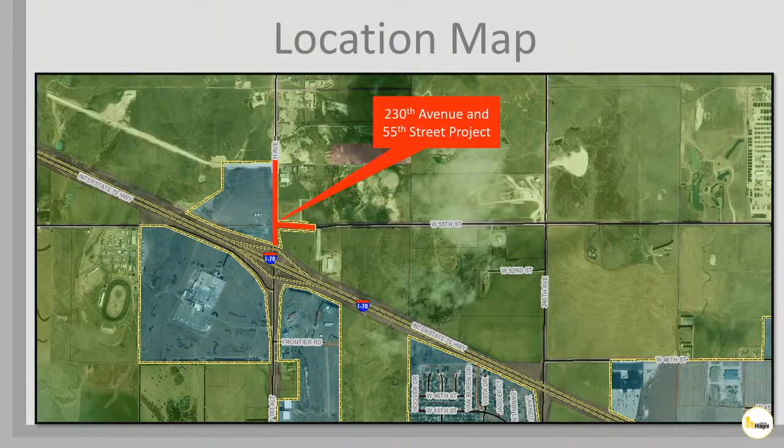Good evening, Commissioners. I am John Brown, Project Manager for the City of Hays. The project to improve the intersection of 230th Avenue and 55th Street is located just north of the I-70 exit 150 interchange.

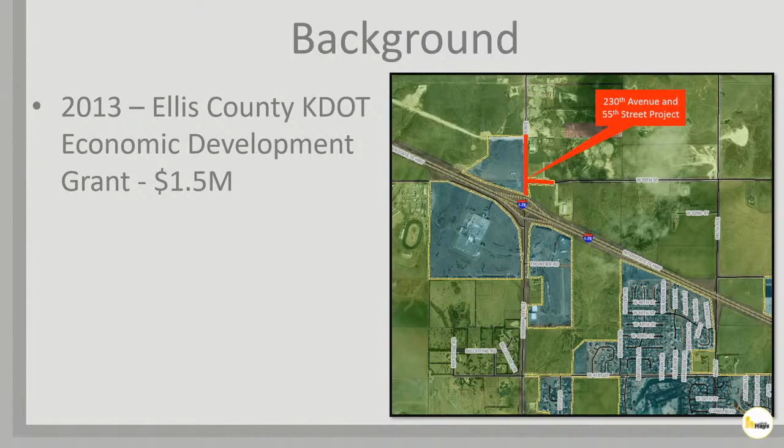In 2013, Ellis County applied for and was awarded economic development funding from KDOT, which eventually amounted to $1.5 million for improvements at this intersection. The proposed development of the Hays Truck Plaza project prompted the annexation of property and right-of-way in the area of this project. In December 2019, the Ellis County Board of Commissioners requested that the project sponsorship be transferred to the City of Hays.

In May of 2020, tax increment financing, a CID, and a developer agreement were approved in support of the Truck Plaza and the 230th Avenue and 55th Street project. In July of 2020, the city entered an agreement with KDOT formalizing the responsibilities of both the City of Hays and the Department of Transportation in advancing this project.

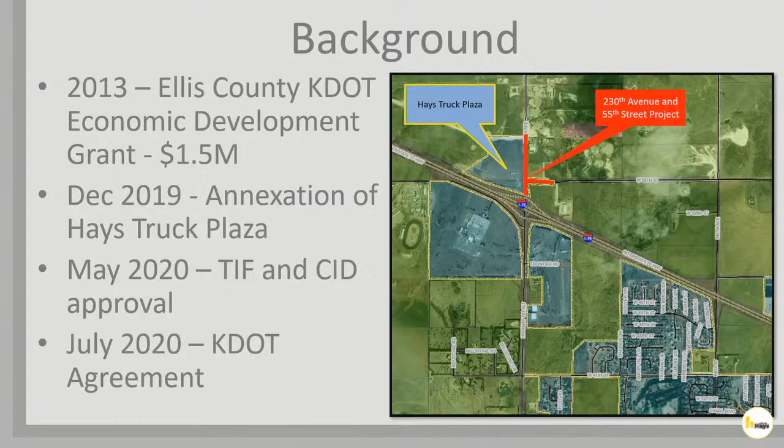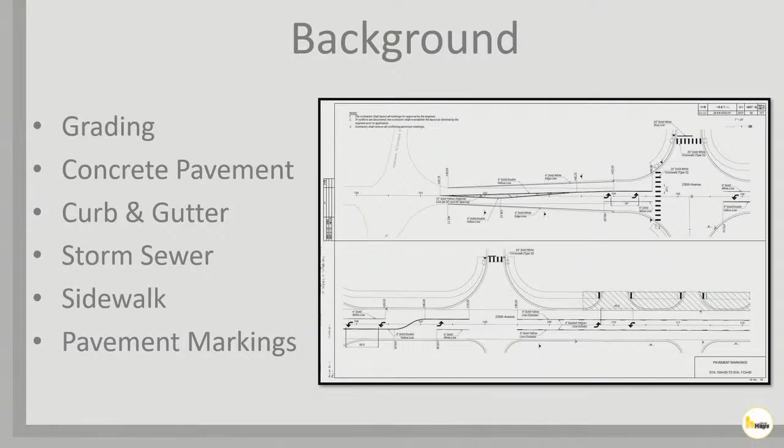The project includes grading, pavement, curb and gutter, storm sewer, sidewalk, and pavement markings to improve 230th Avenue from north of the westbound I-70 ramps to approximately 1,300 feet north of the 55th Street intersection, and improvements to 55th Street from 230th Avenue to approximately 800 feet east.

Since the project is partially funded by KDOT, the city has received concurrence from KDOT to award the bid to Hess Services. The current schedule calls for construction to begin in May and be completed within 120 calendar days. Inspection of the project would be completed by Driggs Design Group if approved as recommended in the next agenda item.

With the low bid of $1.8 million plus the construction engineering costs of $140,800, the total project is currently $2,019,101. The development agreement from May of 2020 between the city and D&J Land and Development LLC requires...

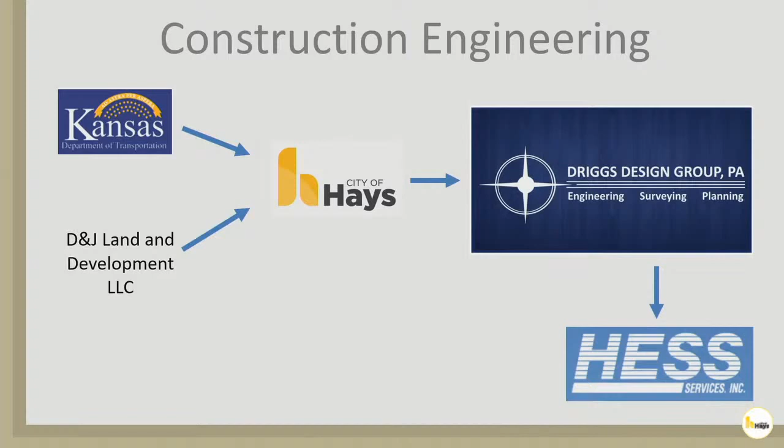The agreement with D&J Land Development obligates the developer to fund the cost of the city to hire a consultant to provide said construction engineering services. As such, Driggs Design has submitted an agreement to provide said professional services at a cost of $140,800 to be reimbursed by the developer.

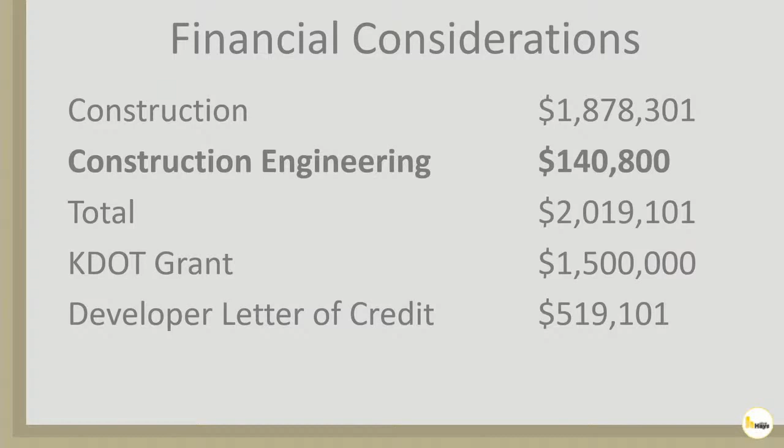As discussed in the previous agenda item, the development agreement between the City of Hays and D&J Land Development requires the developer to cover project costs in excess of the $1.5 million KDOT grant, to include the $140,800 of construction engineering. The commission has the option to enter the agreement with Driggs Design, direct staff to another option, or to do nothing, and the action requested is on the screen.

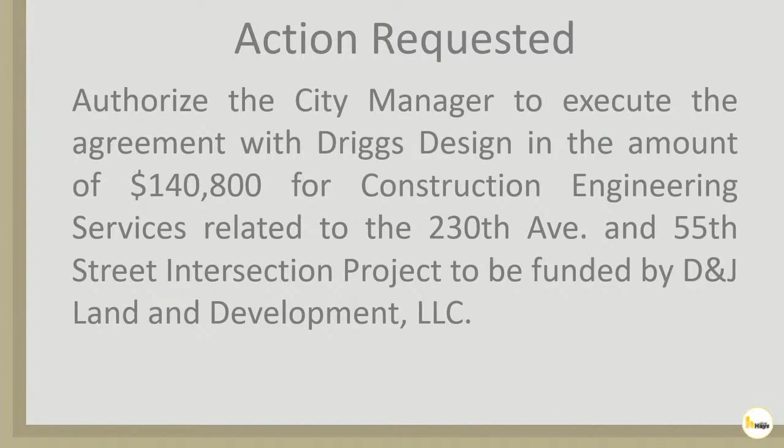Make a motion to authorize the city manager to execute the agreement with Driggs Design in the amount of $140,800 for construction engineering services related to the 230th Avenue and 55th Street intersection project, to be funded by D&J Land Development, LLC. Seconded. Moved by Commissioner Musil, seconded by Commissioner Burgess to approve the action requested and recommended.

Discussion? Hearing none, I'll call for the vote. All in favor, please say aye. Aye. Opposed, same sign. Approved 5-0.

Thank you. Item 8, 2021 water production lime slaker. Did you hear that, Mr. Crispin? Slaker. You did very good. Thank you very much. I learned.

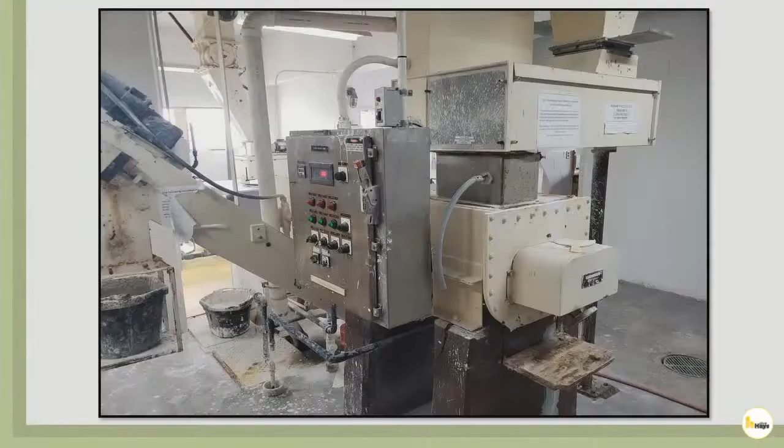Good evening, Commissioners. Jeff Crispin, Director of Water Resources. Staff solicited bids for the 2021 water production lime slaker project to replace the current lime slaker system in the water plant. The lime slaker is an important piece of equipment that converts dry calcium oxide, also known as quicklime or pebble lime, into calcium hydroxide slurry.

The equipment creates the slurry, and then the slurry mixes with water in our large primary clarifiers at the plant. The slurry assists the water plant operator in adjusting the pH and also helps remove impurities in the water within that clarifier. That is a picture of the current unit, and I have some other pictures as well.

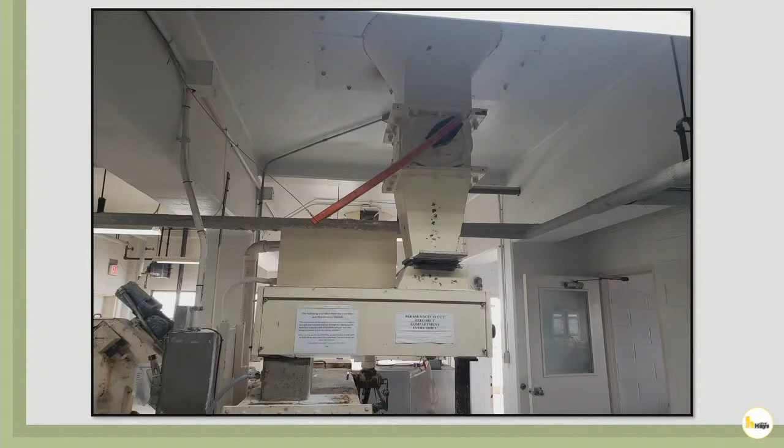The current lime slaker is 15 years old and has had multiple in-house repairs over the years. The equipment has reached its end of useful life and needs to be replaced.

The lime slaking machine runs 24 hours a day, 7 days a week, 365 days a year. The current model has 130,000 hours of continuous use, and I should have updated that number since last week—it's continuing to run right now.

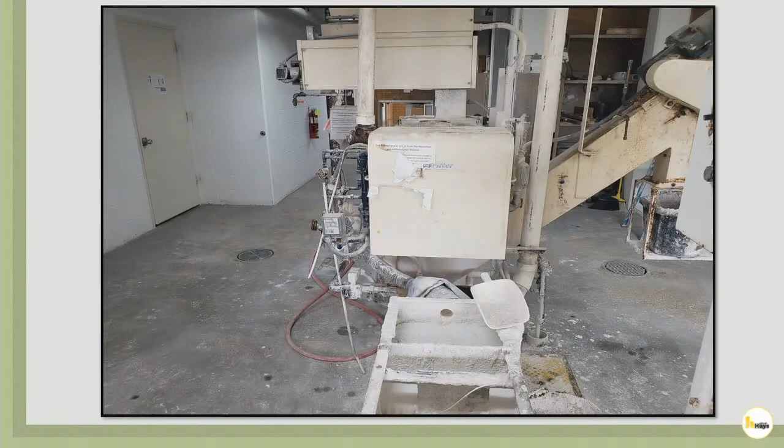This is the top of the machine. That is where it receives the lime, or the product, from the top of the bins when you drive by the water treatment plant. The bottom of this photo, right there, is where the slurry is introduced into the water and then into the primary clarifier.

The top right of the screen, that conveyor, takes larger pebbles and things that should not go into the water, and that basically gets hauled off. We get rid of that when it's full.

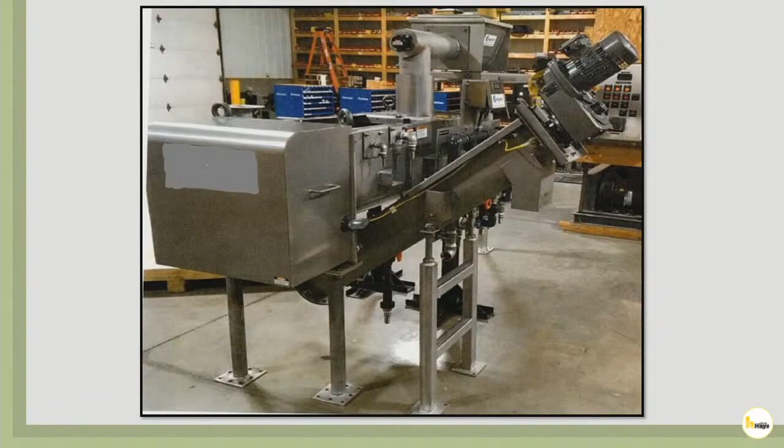Pretty simple. This is a photo of the proposed unit. The proposed unit is stainless steel. It's from the same company as the current unit, and it's designed to work with all the current connections it's already hooked up for. The other nice thing is that stainless steel will hold up a lot better than the current one.

We opened bids—one bid—on March 2nd, 2021. Integrity Municipal Systems of California submitted the bid for $119,000. The equipment is an updated model similar to the current unit in the plant. Integrity Municipal Systems is $81,000 below the budget, which was about $200,000.

One thing I wanted to add: last week we discussed why there was such a big difference in the budgeted amount. We had thought we would have to have it installed professionally, but the last time the unit was installed 15 years ago, staff installed it. So it'll be designed to just basically hook up and go, and they will have a person here on scene while we are doing that work.

After a notice to proceed is given, the unit would take a month to design. They will submit specifications to us to review, and then after approval, it would take 12 weeks to build, ship, and get to us at our water treatment plant. It comes with a 1-year warranty, and 2,000 parts within this unit are available and can be shipped to us within 48 hours.

And we would have probably some of the same parts that could interchange already on the shelf, so that will be helpful. For the financial portion of this project, it was listed in our CIP in the 2021 budget for $200,000 to be funded out of water capital, and the total cost is $119,000.

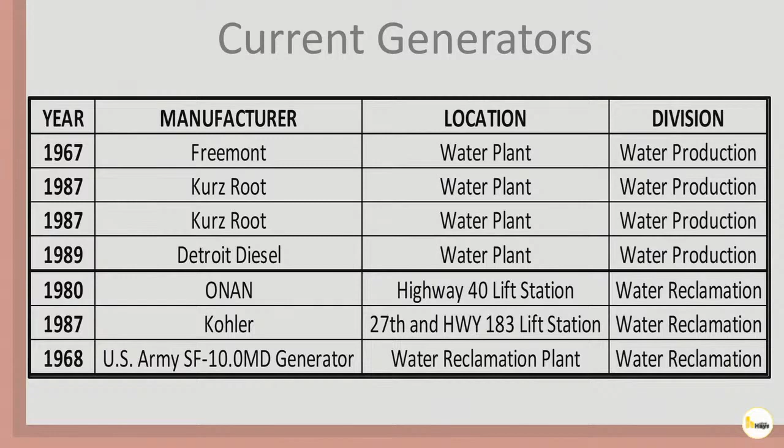And I will mention, I'm not sure if I mentioned it last week, we would use Purple Wave, which is kind of our normal process for disposing of equipment. So there probably will be some interest in those old units.

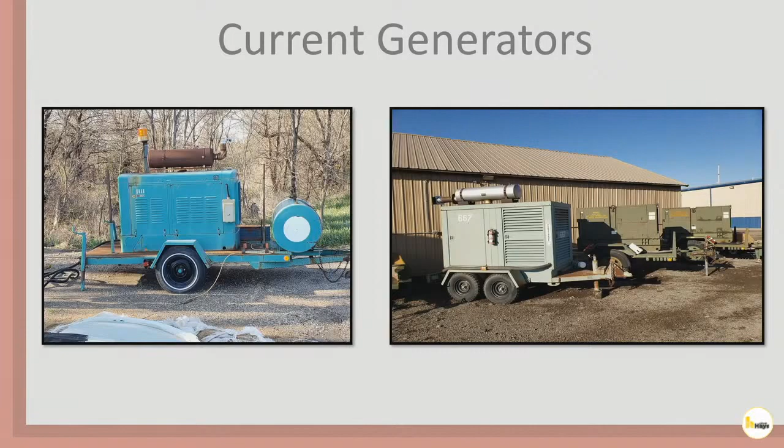I did mention last week we've had situations where we've used them. Our booster station near 41st Street and Skyline, when you take that curve, there's some underground items there. That's a booster station we've had to hook up one of the units to operate, before the commission approved a new line and new booster station. That booster station was the only way to get water across, and if it lost power, you couldn't move water across to I-70. So it's very important we get those. Water reclamation has 3 generators, and the water plant has 4.

Bids were opened on March 23rd with 8 contractors listed. Foley Power Solutions of Topeka, with an office in Wichita, Kansas, submitted the lowest bid at $94,705.74. When preparing the 2021 budget and obtaining budgetary quotes for generators, staff was unaware of the necessity to include a 25-foot power cord and required plug accessories to connect these units to our lift stations and water production wells. This additional accessory added about $15,000 to the total equipment bid, so without that we would have been pretty much right on.

We intend to replace 2 units every year, so I would come back to you next year, hopefully, and present that, and then the following year too. But we will budget accordingly to make sure we are covered. As you can see, there were quite a few bids, including some local ones, like United Rentals and Don's Electric. We had pretty good submissions, but this unit is a very nice unit.

It's a Caterpillar XQ60, a diesel unit, with a 1-year warranty. They said delivery within 24 weeks maximum, but that was the very top end — they said they could get them to us a lot quicker. Foley is located in both Wichita and Topeka. Their service rep stated they have a parts drop-off location in Hays, so if a part had to come to Hays, it would arrive pretty quickly. Service within 24 hours by Foley, which I think is great. That unit could run 24 hours straight on a 75% load with a full tank of fuel. Obviously, I hope we don't have to do that, but it's available, and we would continue water service for our citizens.

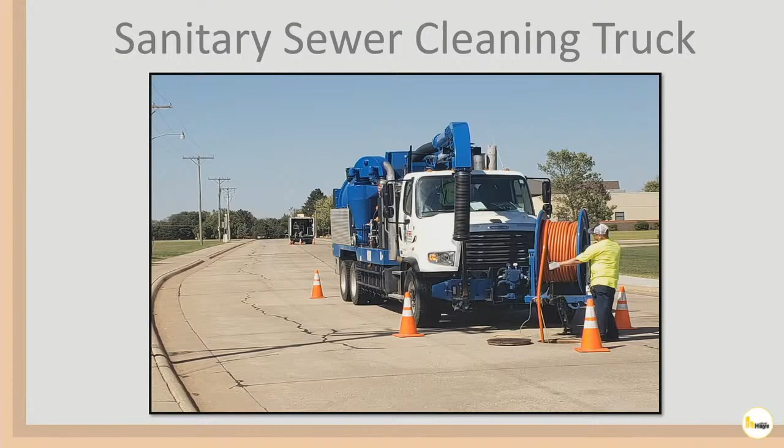A nozzle is inserted in the manhole, and high-pressure jetting is used to remove debris. I threw this one in last week.

The nozzle is pushed with a jet of water from manhole to manhole. Debris is collected from one manhole and disposed of at the wastewater treatment facility.

We require them to use what's basically called a basket to catch anything. We really don't want anything going down the line and getting to our wastewater treatment plant. So they take what they catch, put it into our drying beds, and we take care of it from there.

At the same time that they're doing this, a camera inspection occurs, so we can know the nozzle's going through, it's being cleaned, and we can see any defects within our sanitary sewer lines.

Typically, one pass is for light cleaning, and that's how we've been bidding out this project, because we know every single line's going to need light cleaning, but you don't necessarily know you're going to need medium or heavy cleaning. Medium is 2 to 4 passes, heavy cleaning is 5 passes, and both come with additional costs.

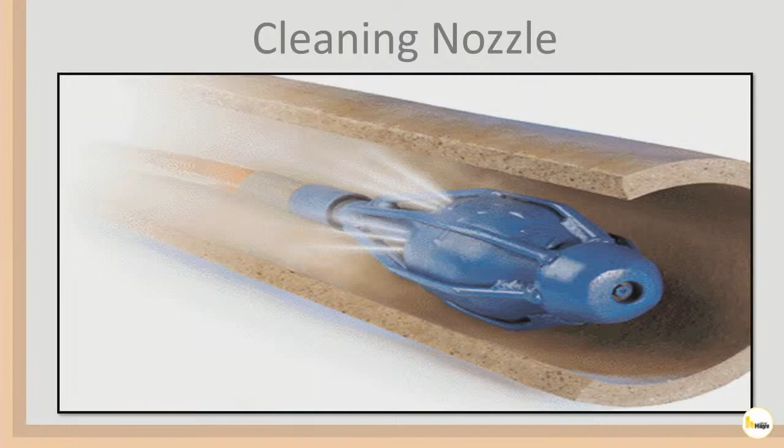Video inspection has also been required as part of our cleaning contract. It is included in the bid amount.

This helps provide early detection of flaws and will allow for repairs to be made before catastrophic failure. It allows the contractor and city staff to make decisions on additional cleaning methods and repairs as necessary.

The foreman that is out works hand in hand with Tobin Miller, our supervisor over our collection and distribution system, and if they notate something going on or additional work needed, he would be contacted and can make a decision on scene, or it comes from me. Previous inspections since 2013 have produced a pretty substantial record of abandonments.

That's an area where the camera can't get through: cracks, holes, tree root issues that need to be taken care of. We've used this information to make decisions on repairs for our sewer system.

In 2020, pipe detectives removed 50 tap intrusions from the project area that was approved last year.

In 2018, we took that data with the Office of Project Management. Anyway, we did point repairs, starting point repairs in 2018.

2019, we moved to lining, which is manhole to manhole. 2020, we did point repairs again, and most recently I was in front of you for the 2021 CIPP lining project, and you may notice a truck running around Hays doing pre-cleaning. So that project has started.

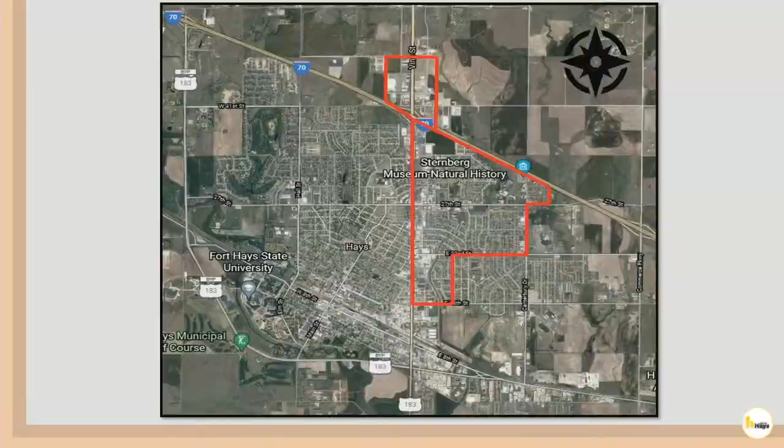This is a new slide this year, added so you know what we follow. We are in section number 4 this year; next year it'll be 5, then 1, 2, 3, and we continue that process to ensure proper flow and that our lines are in good shape.

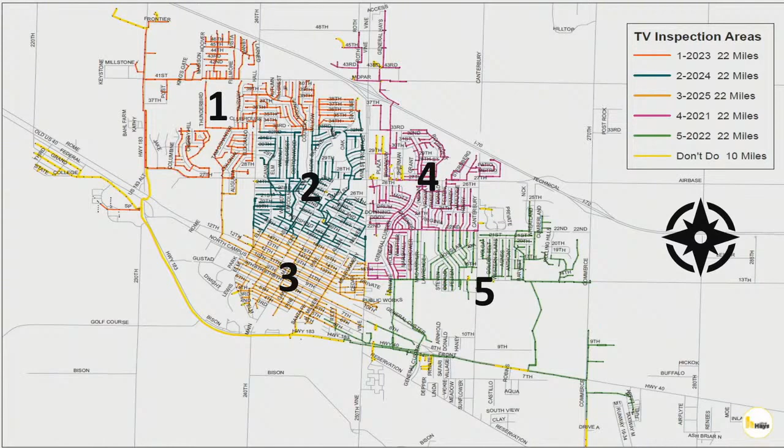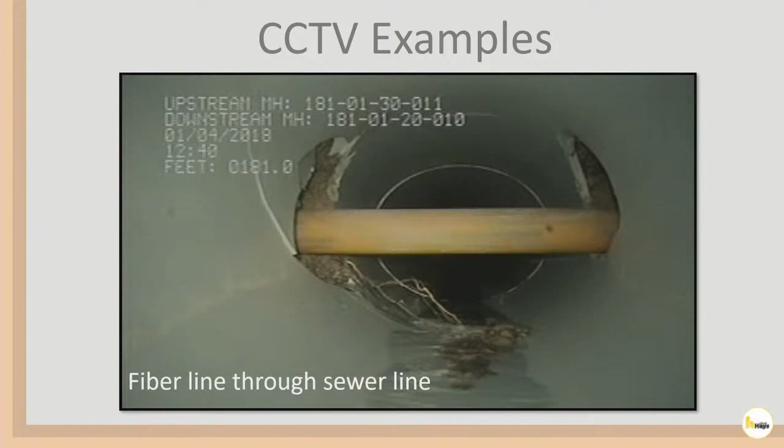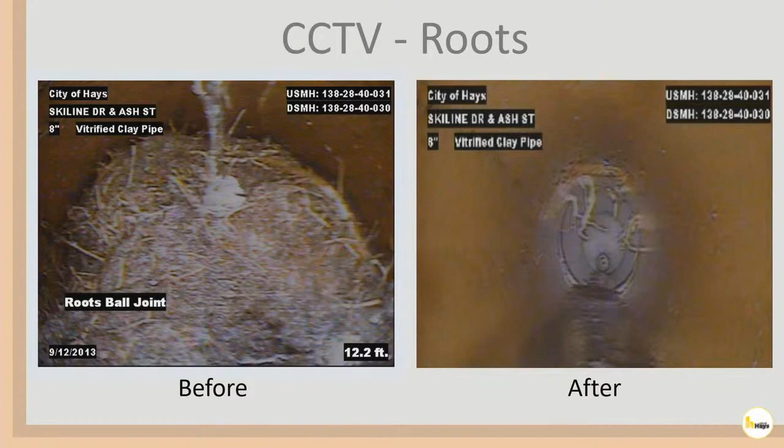We've had that a few times, and we contact them, and they've been receptive to helping us out. This is also called a root ball. They can grow in there from a tap or a crack, and need to be removed because they'll obstruct things. On the right side, you can see a cutting tool that's removing that root and keeping the line open.

I sent RFPs to 10 firms for the sanitary sewer project and CCTV inspection. On March 30th, we opened 4 proposals from those bidders. The low bid for sewer cleaning and video inspection from Pipe Detectives of North Dakota was $108,937.57, for light cleaning of our 8-inch sewer line. You'll see that Pro-Pipe was pretty close to that.

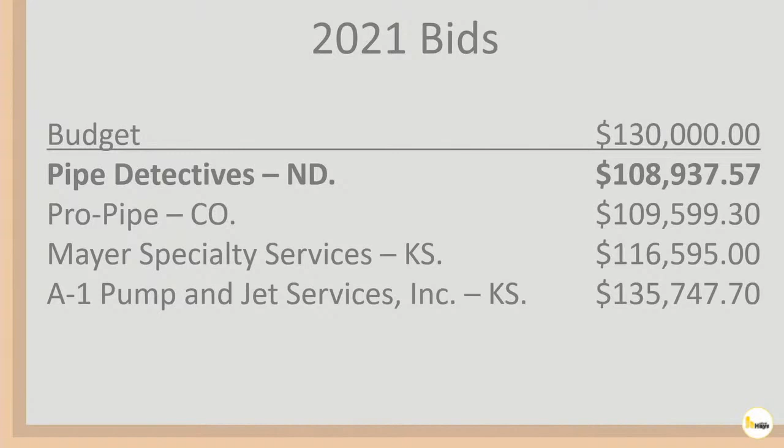We've actually used Pipe Detectives before, as well as Mayer Specialty Services. I did say that last year Pipe Detectives did their first project in the state of Kansas. Commissioner Burgess had asked me to do more work on reference checks, and they did a great job for us, so we're excited for them to come back. After they left Hays, they went and did some work in eastern Kansas for a community, so we're excited to see them come back to this area.

For financial consideration, we budgeted $130,000 in the repairs and maintenance line item for the water reclamation and reuse budget. I am requesting authority to spend up to $130,000. That's important because if they find something they can take care of right then and there that we don't know about, we can get it done with medium, heavy cleaning.

Protruding taps, I explained last time. Your private tap that goes into a sewer main, if there's any settling, can be pushed into the sewer main. So we want to make sure that's completely open. They go in with a machine that grinds them down and makes sure they're flat against the sanitary sewer line, so there is no obstruction.

$350 is typically the price for those protruding taps. Last year we did 50 at $350, which was a $17,000 additional cost that you approved, and we were able to take care of it. So that's really good. Tonight your options are to accept the proposal, provide alternative direction, or do nothing.

This is the action I would request: move we authorize the city manager to enter into a contract with Pipe Detectives to perform light cleaning and video inspection of 116,595 linear feet of sanitary sewer at a price of $108,937.57, with a budget authority not to exceed $130,000, to be funded from the repairs and maintenance line item in the water reclamation and reuse budget.

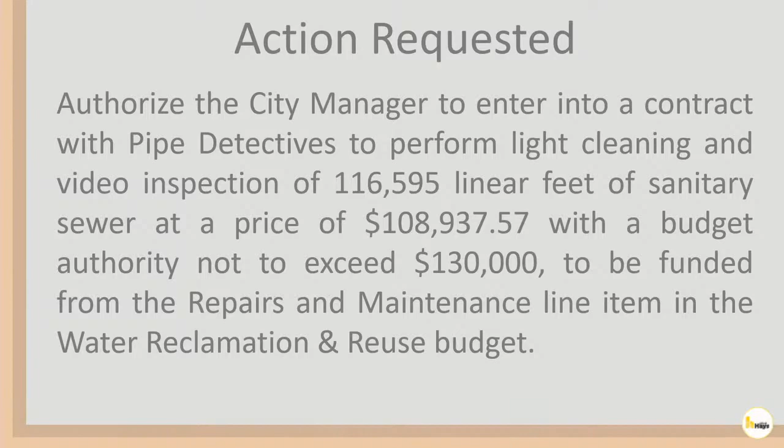I'll second. Been moved by Commissioner Reuter, seconded by Commissioner Melick. We approve the action requested. Any questions? Jeff, how many years have we been doing this?

Contract sewer line cleaning, we've been doing consecutively since 2013. There was one year in there we did some heavy cleaning, I think in 2014 down Main Street. But we've been consecutive now since '13.

So is there any way to tell, let's say we decide next year we're not going to do this for 5 years - obviously you see a lot of issues by doing the cleaning - is there any way of telling what it could cost us if we didn't do this?

Well, if we didn't do it, the problem is the things we don't know - something may sneak up on us, something may break. Then if that line gets plugged, you have backup into anything, and I don't want that. I want to make sure we're taking care of every problem we see. It's a healthy system, able to flow all the way down to the wastewater treatment plant so we can treat it, and we have good flowing sewers. That's just normal maintenance.

We do have a sewer vactor truck that we can take out on emergency runs, and we do that from time to time if we get a call of a backup. Usually it's if a plumber's working on a private issue in a house, but we also go out to make sure our line is flowing smoothly. If we stopped, I'd be afraid to see that after 5 years - I think it's money well spent. I was just curious, thank you.

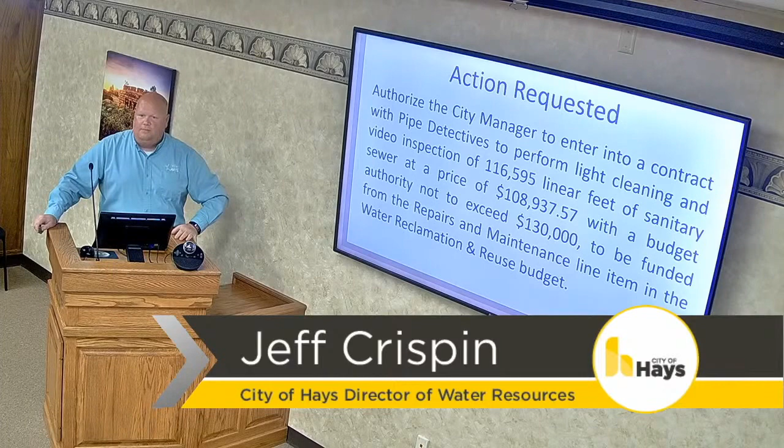Also, kind of like what Sean was saying about waiting, I think the rule of thumb is a flush beats a full house any day. So just remember that. Is that not true? I would have to agree with you. Yeah, turn off his microphone.

Any other questions? Hearing none, I'll call for a vote. All in favor, please say aye. Aye. Opposed, same sign. Approved 5-0.

It might be interesting, because we gave you a real hard time last week about missing that bid by $14,000 for a cord. But I want you to know, Mr. Crispin, that your net result on your budget over all these projects, you're still to the good about $87,000. So don't worry, remember it's me that's bringing that up. Mayor, thank you. I'm just sitting out there. Thank you.

Last item for Mr. Crispin: well rehabilitation water production, award a bid. Okay, thanks again, this is it, last one for tonight. Jeff Crispin, Director of Water Resources.

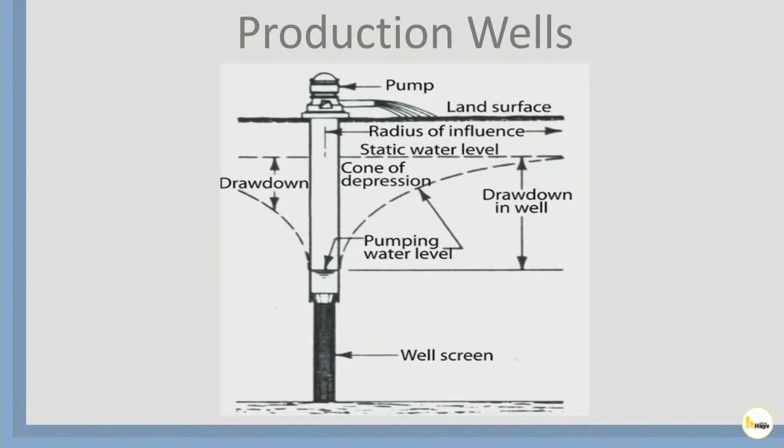One of the things that we try to do is we also are able to say how good we can improve that well when we acidize them in-house. But when we can't do anything further by acidizing, they can come in and use mechanical methods that take us to a new level as far as those wells are concerned.

In 2019, we began the process to create a baseline of all production wells, and this is our third consecutive year of doing 6 wells each year. As of this year, 18 wells will be completed. In speaking with more than one contractor, wells, depending on use, should be rehabilitated every 5 to 10 years to ensure that they are operating as they should.

It kind of depends on the amount of pumping. It depends on the quality of the water that you're actually going through that well. But I believe it is really important to keep these in top shape.

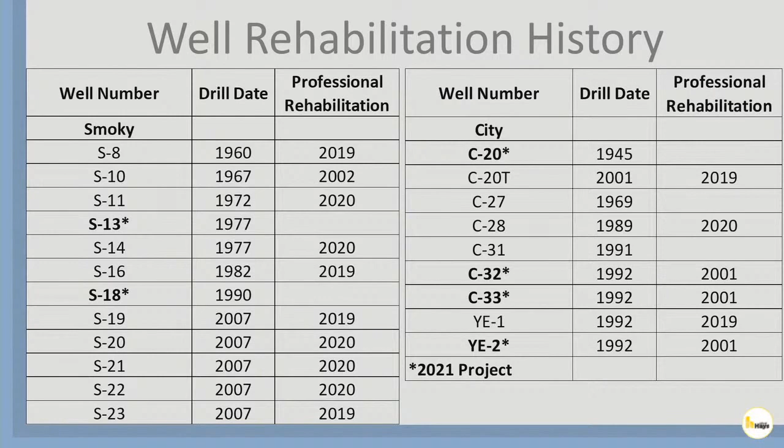This is a list of all of our wells within our inventory. 12 Smokies, we have 6 Dakotas, 8 city, we have 6 remediation wells, we have 5 emergency wells for a total of 37. We are not going to do any professional well rehab on the Dakota wells. That is probably, the Dakota water is probably 2 to 3% of our total production for a year.

We don't use much. Those wells are about 300 foot deep. It is expensive to pump them, and it's salty water, and it is not something we use a lot of right now.

In 2022, we'll have S10, C27, C31, and a couple other wells that we would look at. But you will see upcoming in the next budget that well rehab doesn't just go on forever. There will be a pause, and then we'll probably bring it back after a few years to kind of start over.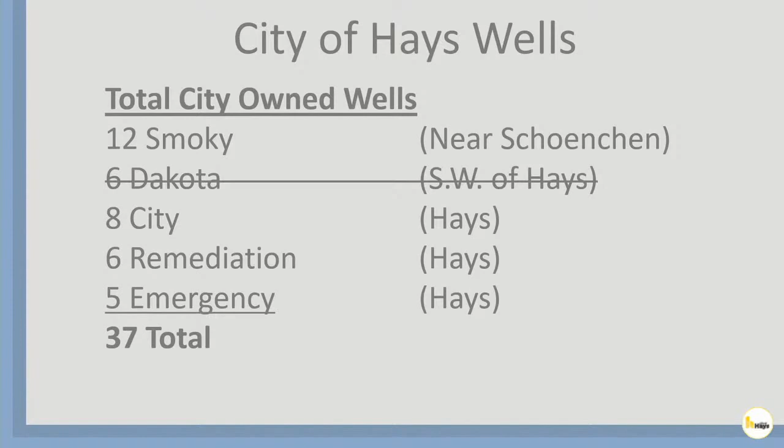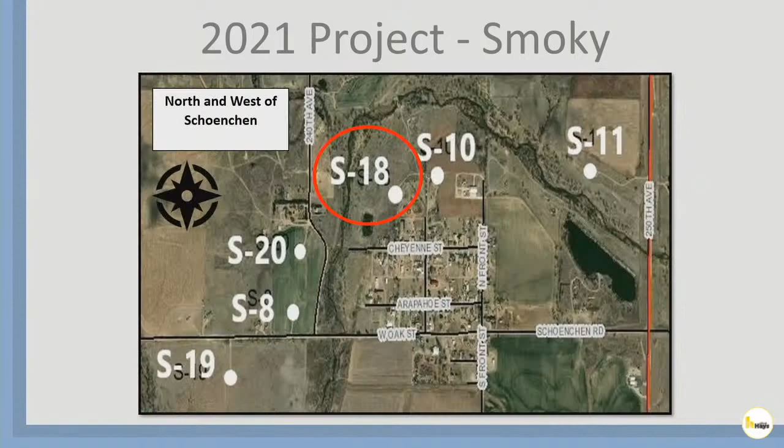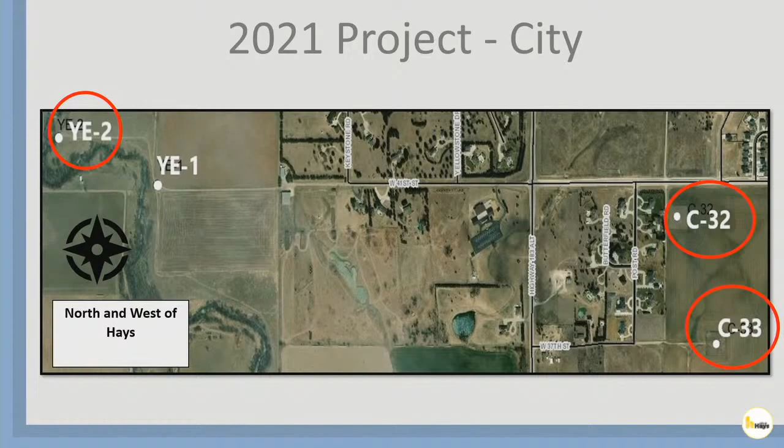YE2, so where you are here is, this is 41st Street, and then this is the bypass right here. YE2 is out there on the far left, and then C32, C33, those are two wells that are near 41st and Post Road in that open field area there.

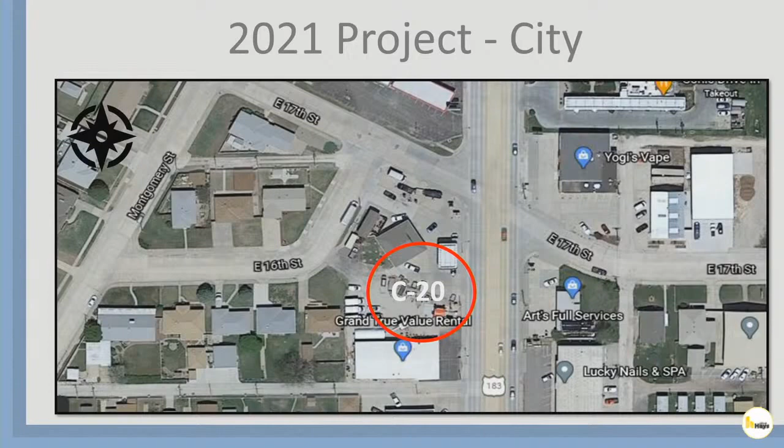Also, we have C20, which is very close to 17th Street and Vine. If you drive by the True Value rental place there, it's right off of the curb line there, and so that one's going to be rehabilitated.

So we opened 2 bids on March the 2nd. Downey Drilling of Lexington, Nebraska submitted the lowest bid at $65,246. Downey Drilling's bid is below the budgeted amount of $80,000. And they were also awarded the project by you in 2020.

We have used both companies before for many different things, so I feel comfortable with either, but the low bid, which is very close, would be Downey Drilling. Also, as I mentioned at the end of last week's meeting, I did send the bid to Karst Well Service, because they've done a lot of work for us too, but due to their workload with a lot of contractors, they weren't able to bid, and the owner actually called me to talk about it. So we've been sending the bids to them for a couple years.

In the financial part of this, it's listed in CIP for $80,000 to be funded out of the projects line item on the water production and distribution budget. The total cost is $65,246, and one may ask, why aren't you asking to spend up to $80,000? The reason is because we budget for repairs in our normal budget already for equipment expense and repairs and maintenance. Each time they pull one of those, they take the entire pump and motor out to their facility, look it over, check for problems, and work with us to let us know if there's something that they see that we can't see from the outside, to ensure those are working properly.

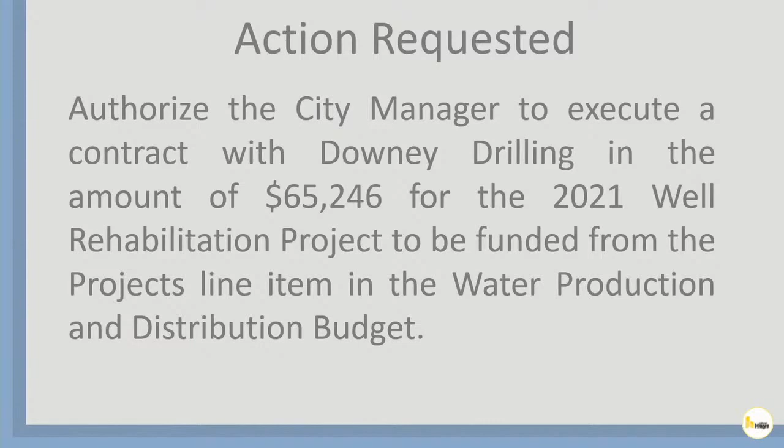I'll move we authorize the city manager to execute a contract with Downey Drilling in the amount of $65,246 for the 2021 well rehabilitation project, to be funded from the project's line item in the water production and distribution budget. Seconded. Been moved by Commissioner Reuter, seconded by Commissioner Burgess.

Any questions? I have a couple of questions. Commissioner Melly, when we rehabilitated or changed the configuration of the wells in Big Creek, what year was that? Or maybe Smoky? Smoky, that was... 2009. Now, was that for better water production?

We drilled some new wells, and we lengthened the well field out on either end. Got rid of some that were close together, and then re-drilled a few to provide better spacing. So if you look at the well field as a sponge that soaks up water, we had a lot of wells concentrated in a small spot, so it's only soaking up water in that spot. It was spread out a little bit to take better advantage of that.

So that was 2009. By doing this, it's pumping more efficiently. Yes. Also, at that time, we acquired the water rights to those wells. We purchased those where before we were basically leasing them. We capitalized the leases, bought the owners out, and now we own them.

I knew there were some changes. I wasn't sure. Okay, all right.

Thank you, Jeff. Maybe I should have asked you this last week, but for the public's knowledge and the other commissioners: the average depth on the Dakota wells is 300 feet. The Smoky wells, all of our wells, are between 30 and 50 feet, and the city wells are approximately the same. Every well ranges between 30 and 50 feet deep, other than those Dakota wells.

Also on the Indian Trail Bridge, service crews did replace the aprons on either side, both the north and south side. The photo on the left shows a deteriorated apron, and on the right you can see it with the fresh concrete that they put in.

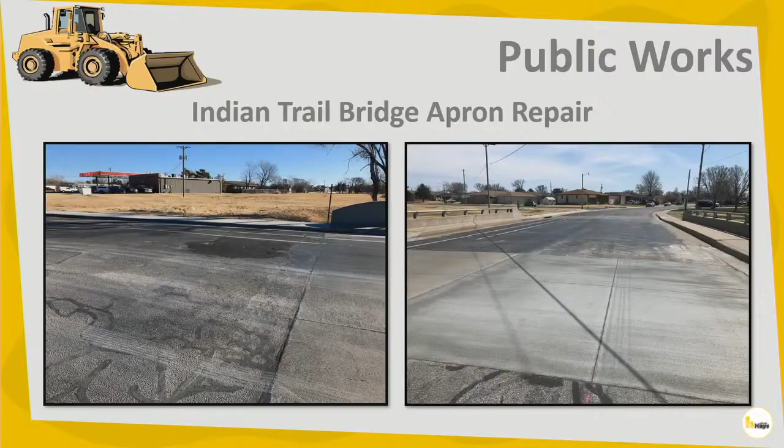Stormwater staff with Kansas State Watershed Specialist constructed 74 rain barrels for distribution to the public.

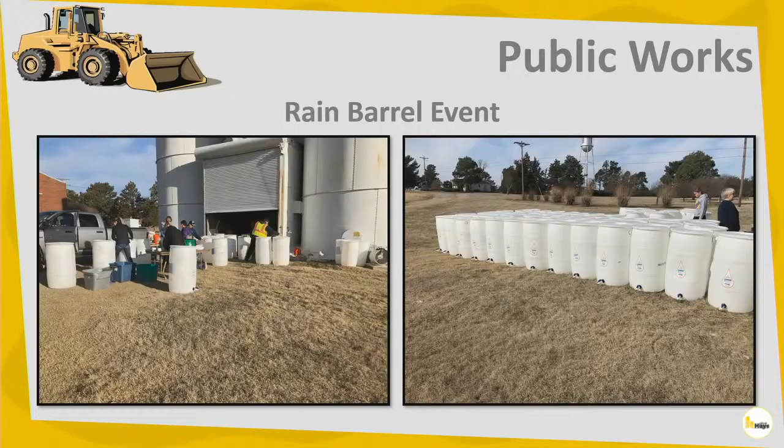In the Parks Department, channel catfish were stocked at Vineyard Park Pond on April 14th. So if you're a fisherman, get out there.

The bison herd completed spring vaccinations. We're probably one of the few parks departments, if not the only one in the state, that takes care of bison.

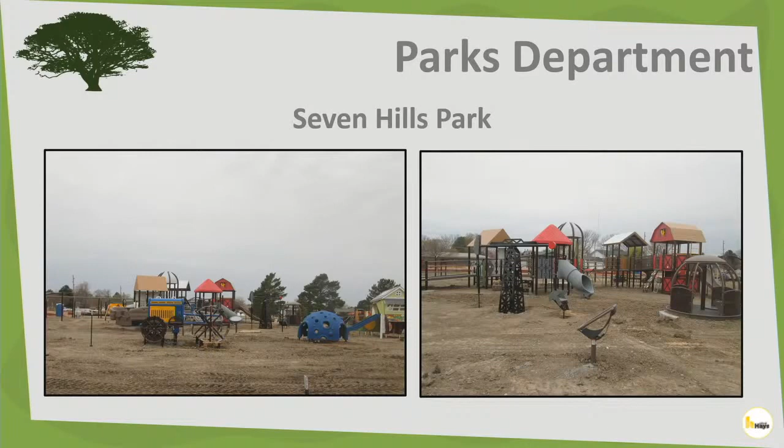Park staff installed a memorial bench at the Pershing Court flower bed. Seven Hills Park progress continues on the Arc Park. We're currently waiting on fall zone installers for the rubber matting to be installed. We don't know when they'll arrive, so there's no estimated completion time, but it's pretty close.

At the aquatic park, we replaced damaged pool grates and repaired irrigation lines.

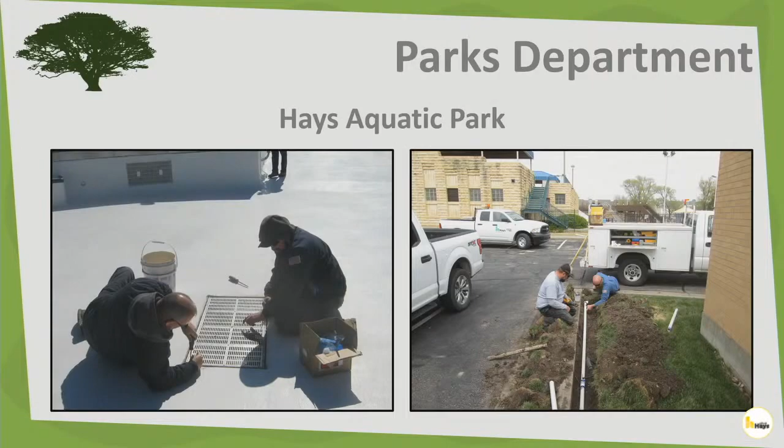In public safety, information technology is doing a big project: the public safety software awarded to the county through CARES funding. This is a monumental task, scheduled to significantly launch in March of 2022, so really a two-year project.

Right now IT has allowed city staff to connect and start configuring the software associated with the dispatch system. The next phase will involve cellular modem installation and configuration for patrol vehicles to access the public safety software.

In water resources, the World Water Day Fun Fest was held. Commissioner Reuter was there helping out, as well as city staff including Tobin Miller and Graydon Clapp, sharing information about water line maintenance and distribution.

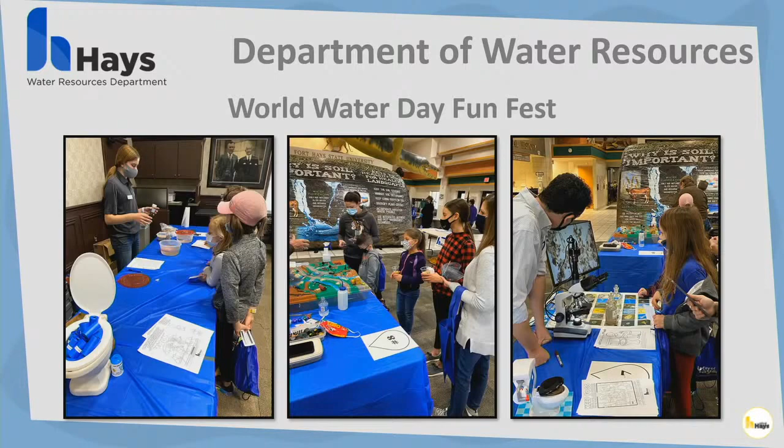We've also talked about the 4-H Water Ambassador Program. On the left is Marissa Wassinger, who shared information with participants. In the middle, a group of young people learning about watershed pollutants. On the right, Water Reclamation Superintendent Jason Regal describing the bugs found in the wastewater treatment process.

Also on social media, the Department of Water Resources has been promoting the hashtag Plants for Hays, to encourage people to plant native, water-conscious plants.

We also had the Water Poacher Awards ceremony, and each of you are in this photo somewhere, so this was a fun event.

The CVB has been creating virtual tours found on visithays.com. There's a little arrow you can click to walk through the space, similar to other virtual tour experiences. This was kind of their first test with the city offices, and they've also done one for the Strand Event Center, with lots more planned.

In addition to the Strand, they did an Event Center video to alert the public about the space now that it's ready and renovated. The CVB did something similar with the Hilton Garden Inn.

Kansas Shrine Bowl: last month, Janet Kuhn of CVB gave tours to the Kansas Shrine Bowl executive director and a member of their board of directors. They visited the Fort Hays State athletic facilities, residence halls, as well as the Hilton Garden Inn.

This weekend, Janet is going out to Emporia to pitch in person to try and get the Shrine Bowl here in Hays next year.

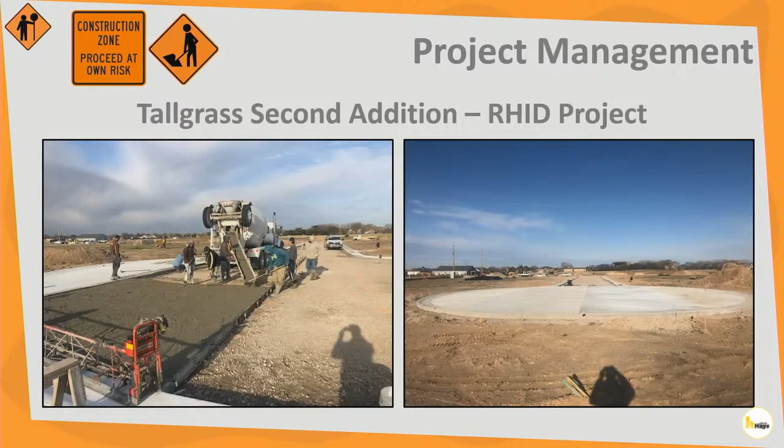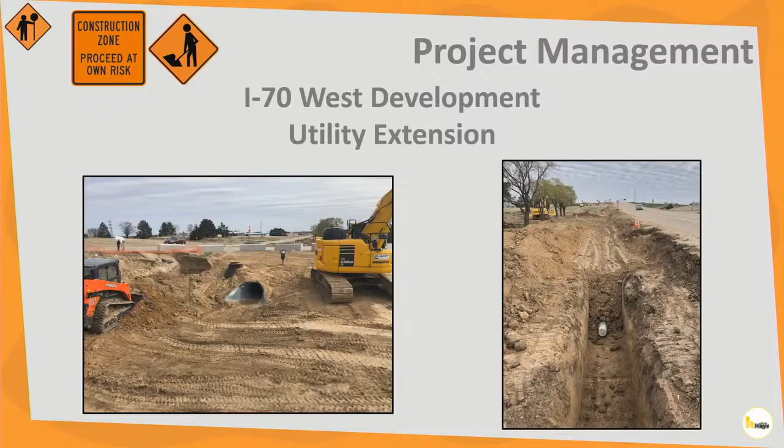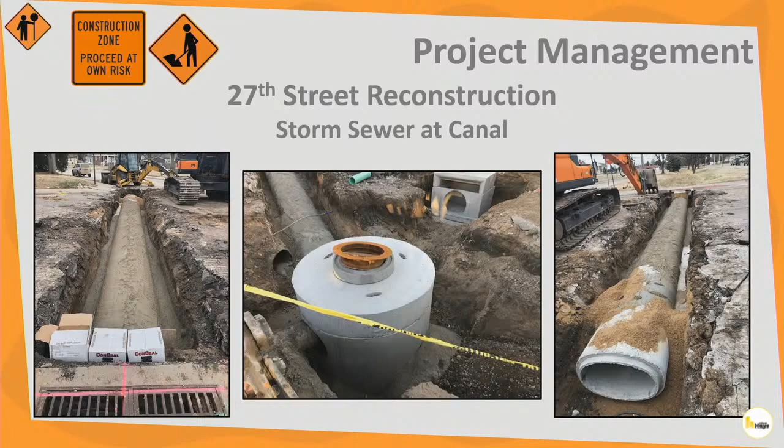27th Street has begun reconstruction, as I'm sure you all know. It started March 25th, and we had to temporarily close it to install a storm sewer pipe across the intersection of 27th and Canal. Within 2 days, the temporary surface was placed on top so you can drive through it.

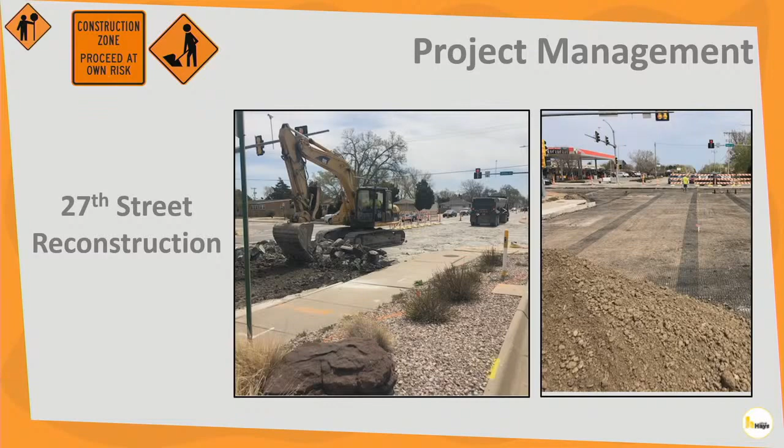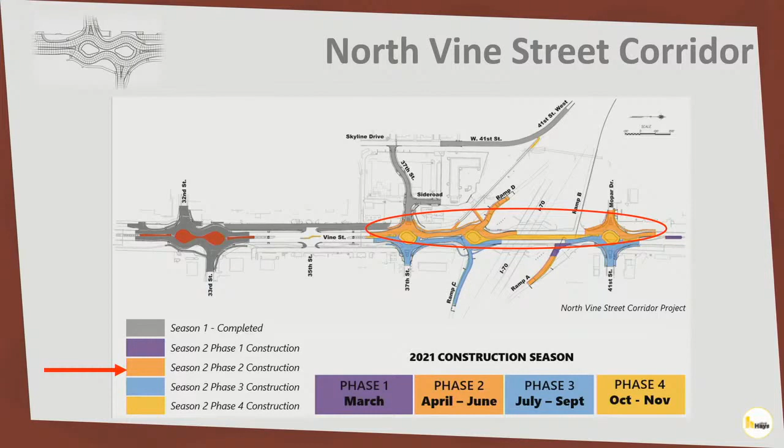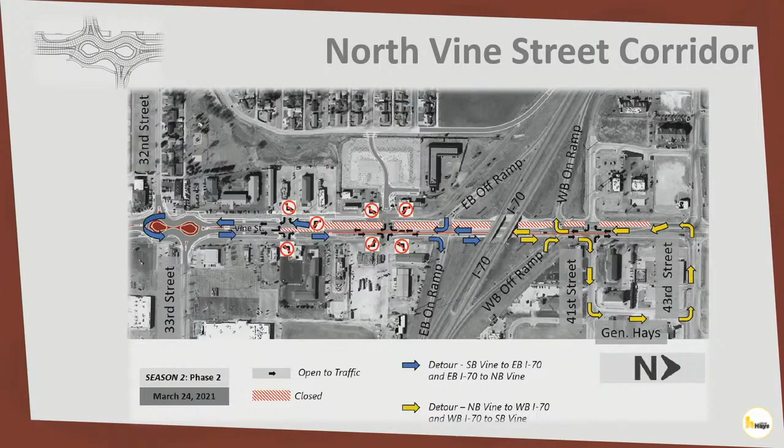On March 24th, phase 2 of the second season of the Vine Street Corridor project began. Traffic is reduced to one lane in either way, and it's been pushed over to the east side, and the orange is where they're currently building. We've seen this a couple times with the detour still in place. You get a good look at Vine Street to get where you need to go.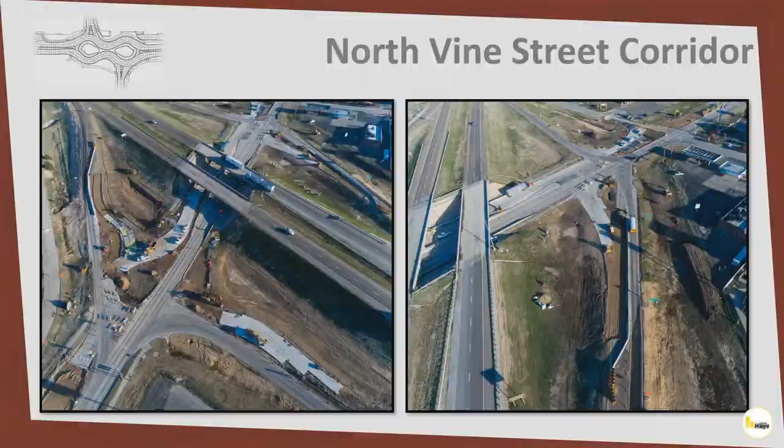I have a couple questions. I see that Melissa's in the back. Melissa, do we know when, or maybe you can answer it, Colin, do you know when the award will be made for the Shrine Bowl?

Hello, Melissa Dixon from the Convention and Visitors Bureau. I do not know when we will get that notification, but I can confirm that it's actually for the 50th annual event, which will not be till 2023.

Thank you. The drone pictures are absolutely outstanding. I was totally lost until I sat down and looked at those. Are those on our website that we can refer our citizens to? I think we do put them on. I'll have to look, I feel like we do.

If John was here, John would be able to answer this, but John's not in that chair right there. I will email you, but I have a strong belief they would appreciate it. Melissa, you might try to do something on social media talking about it, because once I looked at all those pictures, it all made sense. I drive through that thing all the time, and it didn't make sense. So seeing it from above was very, very helpful.

I don't know about everybody else, but I'm getting good comments. Things are calming down a little bit. People are figuring out how to drive through up there, and I'm getting real good comments that they can't wait for it to be done. The virtual tours are outstanding. I've gone out and looked at what you had out there, and you really do a nice job with those.